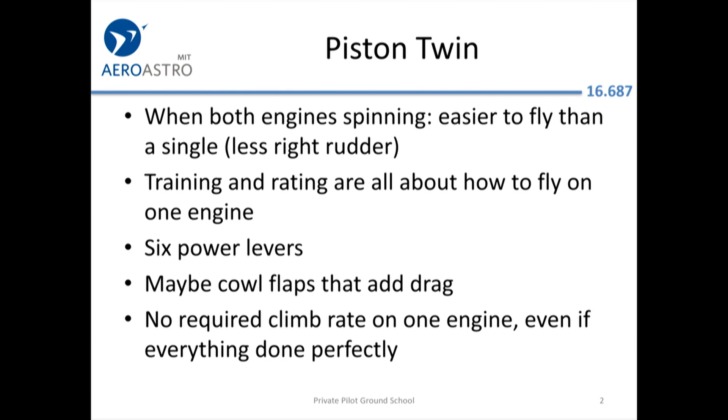There is, by FAA certification requirements, as I think I mentioned earlier, no required climb rate. It may be a truly crummy airplane on one engine. So that's why people say that second engine either takes you to the scene of the accident.

One engine expert, Mike Busch, said he came to appreciate the Cirrus parachute. It's not like having that extra engine out there on the wing trying to kill you all the time - it just waits there quietly until you need it.

Piston twins have an illustrious history. Here's an Aero Commander piston-driven twin that was actually Eisenhower's Air Force One. This also tells you something about the growth of government - when Eisenhower was president and wanted to go to a smaller airport, this is how he would go, in an airplane designed for about 6 people.

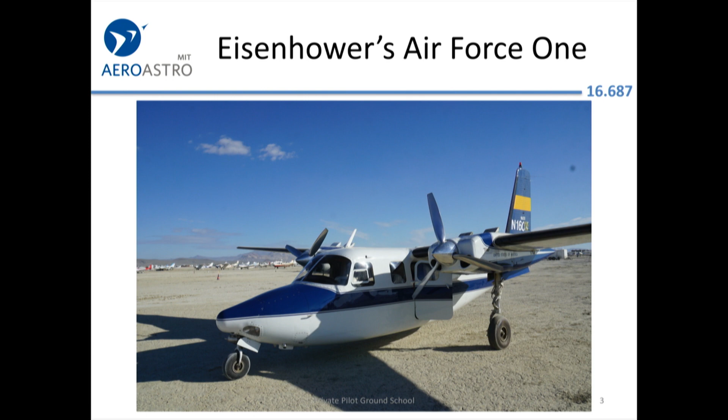Okay, this is probably what you'll be flying, which is the Piper Seminole. It is unusual in that the props counter-rotate, and that has some advantages that are beyond the scope of this talk. It's a design from the 70s, based on designs from the 50s.

Where the problems happen - so have a look here. Can anybody immediately see what one problem might be? Let's say the left engine quits and you have to manipulate these. What happens?

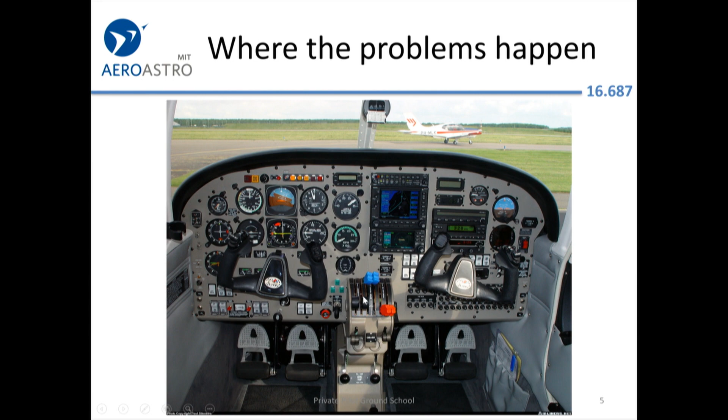You're manipulating the controls for the good engine instead of for the failed engine, inadvertently. So it's just an interface that's overly complex given human frailties.

So what do you have to do if an engine quits? You don't want the drag of that propeller out there that's not being driven by the engine. So you push all the levers forward to try to get maximum power out of your good engine. You'll have to put in some rudder to correct the yaw, because the airplane's going to be pulled to one side or the other, depending on which engine is still running.

And then there's the old adage: dead foot, dead engine. So if your left foot is flat on the floor and it's your right rudder that's in, then you know that it's the left engine that has failed.

Then you try to verify the dead engine by pulling back that throttle. So you'll say, okay, I think the left engine's failed, I'm going to try monkeying with the left throttle. And if that has no effect on the flight characteristics, you verify that it's the left engine.

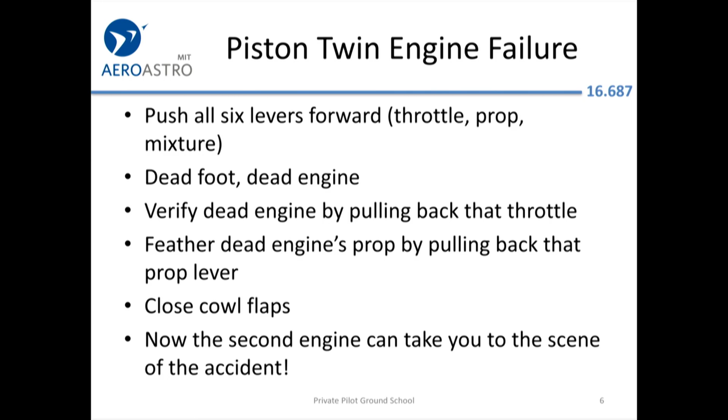Then you feather the dead engine by pulling the prop control all the way back. If you're in a 2-pilot crew, you'll get your co-pilot to verify: I have my hand on the left prop control. You pull that back, close the cowl flaps, and only now do you have any chance of getting an actual climb.

So imagine if this engine fails shortly after takeoff - it's a lot of stuff to do very quickly, and you have to do it all right. If you miss even one of these things, you may not be able to clear obstacles at the end of the runway.

Now, of course, your typical piston twin takeoff is a stressful time for an engine, 100% power, but there's definitely more engine failures that occur en route. So the generally negative impression of piston twins might have to be revised if your primary mission is flying around the Caribbean islands - you might actually say you'd rather have that second engine.

Is this within human capability, that sequence that you just saw? Yes. In World War II, when engines weren't being made with as much precision as they are now, it would be ordinary to have 1 out of 4 engines or 1 out of 2 engines fail on any given mission.

But they also got it wrong. There's one very famous guy, Louis Zamperini - some of you may have seen a movie about him. He floated in a raft for 47 days, which I think was a record at the time for survival at sea. He was on a 4-engined aircraft, and one engine quit.

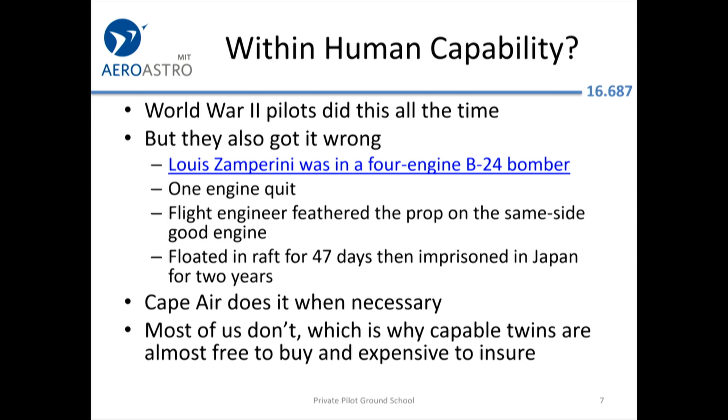There were about 4 pilots in the cockpit. Remember, a flight engineer is also an airman, so if we count the flight engineer as a pilot, there were at least 3 or 4 experts up front. And as a team, they feathered the wrong engine, killing a second engine that was actually good. Now they had 2 engines working on only one side of the airplane, and it was uncontrollable. So they went in the water through human error.

Cape Air has a great track record. They've had a handful of engine failures over the years. They fly piston twins all day, every day in the Caribbean and around New England. When they have a problem, usually it's not a complete failure, but maybe there's an ugly indication on one engine, so they'll shut it down. But they do a lot of recurrent training, since that's what they fly all day, every day.

The typical family airplane doesn't get flown as often, and the pilot isn't as proficient. So the capable twins are very inexpensive now, except for the Beechcraft Baron, which is kind of the most sought after. They're a little more expensive to insure than the comparable single.

Just the other day, I got a quote from a local insurance agency called Plane Insurance. We found out that if you look at a $200,000 aircraft being flown by a pilot with 250 hours of experience in type in that exact aircraft, and with $1 million of smooth liability, meaning no sublimits, that means if there's just one passenger, they would pay out all $1 million for injuries to that one passenger. Some policies have like a $100,000 per person sublimit.

Anyway, it was about 50% more for the Baron, $3,700 a year versus $2,500. So there you have it. Again, it's not insanely risky. You can quantify the risk the insurance company has, but it is riskier.

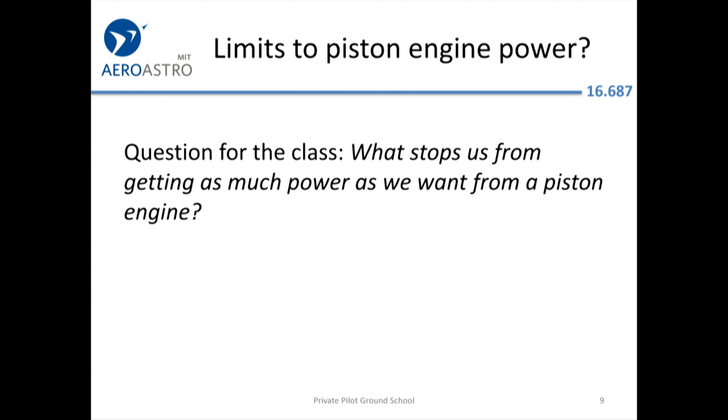So what's the limit to a piston engine's power? Why is it that we can't get 6,000 horsepower out of our piston engine? What do you guys think? Cooling is one, sure. What else? What's fundamentally limiting our ability to produce power? Remember, all the power that we produce is by burning fuel and oxygen.

Aziz? Size - yeah, I think that's a good insight. It's the size of the cylinder. You only have so much fuel and air that you can combust. And once you've blown all that up, what do you got?

Nothing. So if you want to know why you should never be like the Silicon Valley heroes and never hire anybody over the age of 30, the inventor of the modern jet engine was only 23 years old, I believe, at the time the patent was filed over in England. He was a cadet when he conceived of the idea at the Royal Air Force College.

He said, well, look, these pistons, no matter how high up you go, no matter what you do, all you can ever do is burn the volume of air and fuel that's inside the cylinder. So what if we just adapt this gas turbine, which has already been invented? It was kind of invented in 1791, but not really practical to fabricate at the time. But look, we're just sucking in all this air. We can probably get 20 times as much air in if we just vacuum it in and suck it into a turbine and then light it on fire. So that was the fundamental insight for why a gas turbine is going to be a better machine for propelling aircraft.

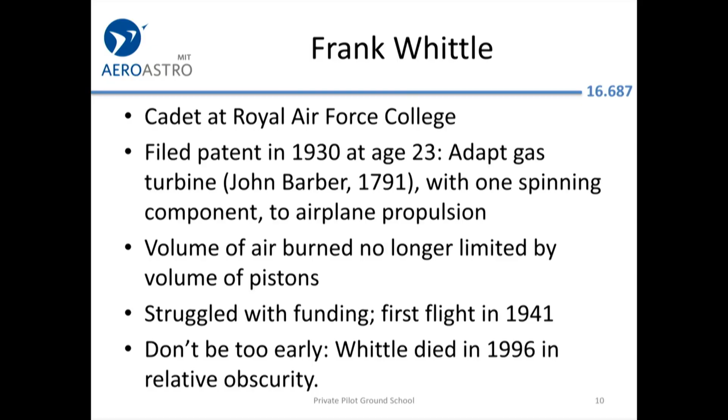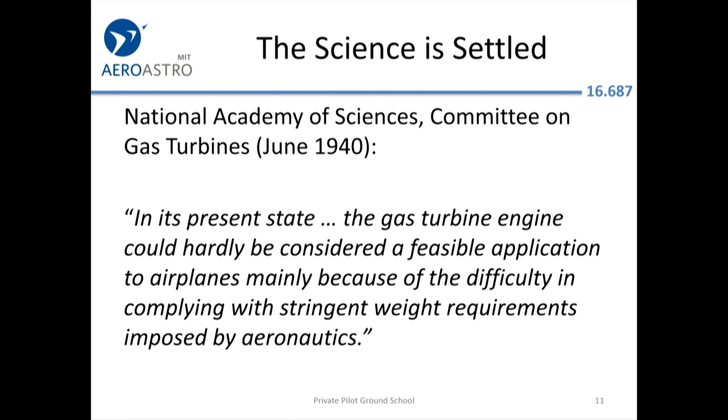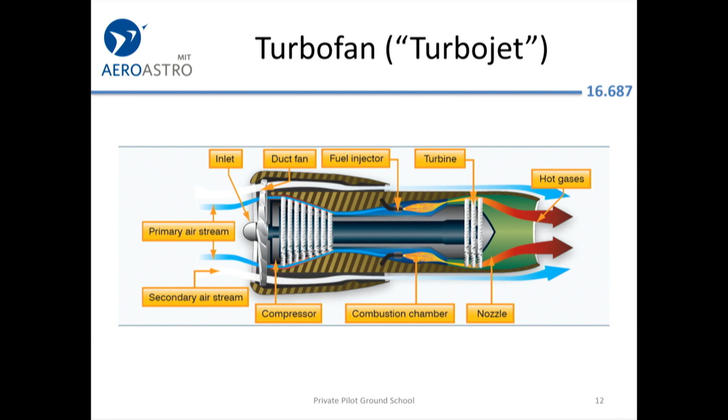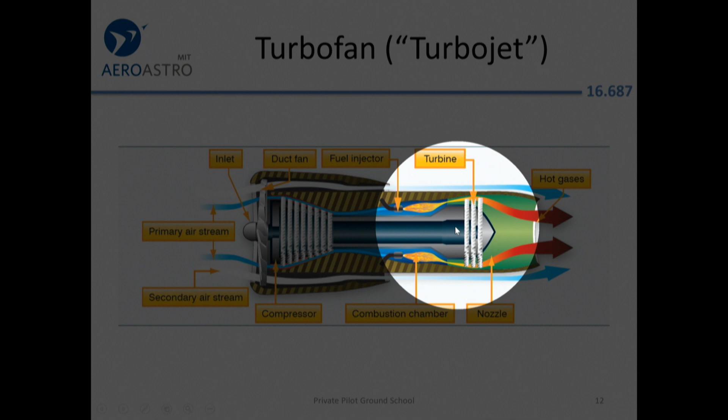So just to remind you, you have the compressor section where air is being squeezed. Now you introduce some fuel. It catches on fire from the extreme heat, or the igniters if you're just starting up. That drives these power turbines, and some of the spinning from the power turbines goes back to spin the compressor wheels as well as the fan in front, which is kind of like the propeller.

All right, what about having two turbojet engines? A lot of people like to see two engines on their aircraft, especially airline passengers. If you have an engine failure, what do you do? The answer is pretty much nothing. Maybe if it hasn't been done automatically for you already, you can advance the thrust levers. If the airplane is yawing, that's sometimes automatically corrected for you to a substantial extent by the yaw damper. You will step on a rudder to do the natural thing and bring the nose back pointed to where you want it pointed, and it'll keep climbing nicely.

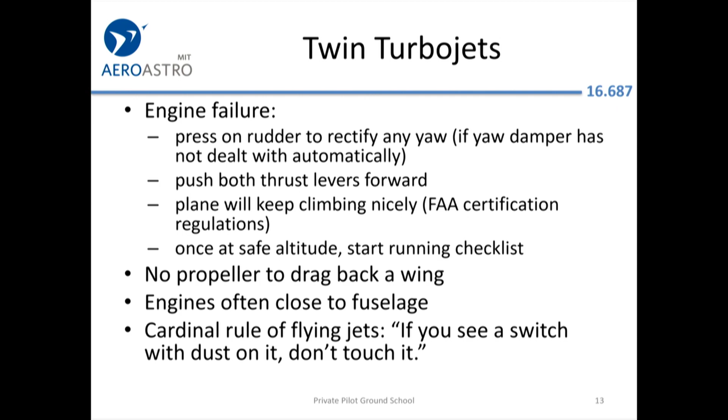You've arranged everything, both in terms of the design of the aircraft and the weight at which you took off, so that no matter the environmental conditions, you will be able to climb and clear the obstacles. This can be a challenge if you're taking off out of a mountainous, high-altitude, hot airport. You're not going to have a full load of fuel and a full load of people and bags, but by regulation, you're going to be able to clear the terrain safely, even on one engine.

Why is it so much easier? You don't have a propeller that'll drag back a wing, and therefore there's no urgency about feathering. You also have a little bit less of the crazy yaw because the engines are, in some aircraft, pretty close to the fuselage. So basically, you can still apply that cardinal rule of flying jets: if the switch has dust on it, don't touch it. So you don't have to take immediate action.

All right, if it's turbojet powered, though, you do need specific training, and you have to pass a check ride specific to that aircraft.

So most of you guys, except for Francis, believe that Captain Sully was all by himself in the A320, but actually anything that's more than about a 10-seater almost always requires two pilots, and according to the type certificate, it's not even legal to operate even the larger business jets with one pilot.

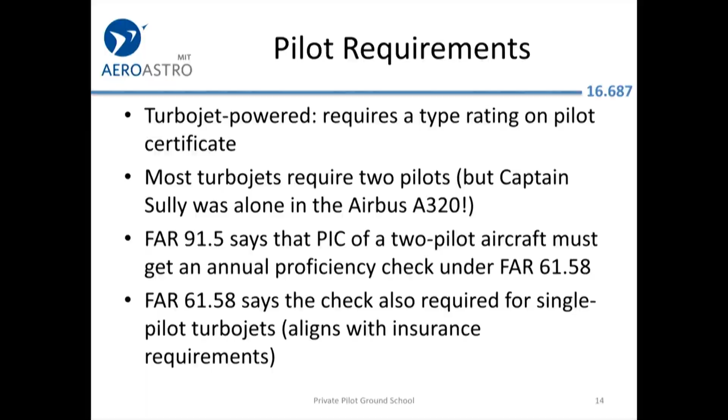There is an old FAR 91.5, I believe, that says there has to be a proficiency check annually for the pilot in command of a two-pilot aircraft, and more recently, the regulations were updated for single-pilot turbojets so that a check ride has to be done annually, which is not really that different from the insurance requirements of annual training. They just made it a little more formalized with FAA bureaucracy.

All right, turbojets that you might own: the single-pilot business jet with kind of a straight wing. They said initially the Cessna Citation was so slow that birds were hitting it from behind. But sometimes safety and having it be easy to operate by people of ordinary skill, or even lower skill levels, is better than getting that last 50 knots of speed. And that's what Cessna figured out.

So they're still kind of a leader in this area. They produced the Cessna Mustang, which you see there at the right. Some of the Microsoft folks spun off a design called the Eclipse. It was supposed to have these new cruise missile-inspired engines from Williams. The engines didn't work, so the 1,500 nautical mile airplane became a 900 nautical mile airplane with a Pratt & Whitney, more conventional design engine that's used on some of these other designs. The Embraer Phenom 100 has essentially the same engines as the Mustang, same family. HondaJet has an innovative engine designed by GE and Honda. These have all pretty much been business failures.

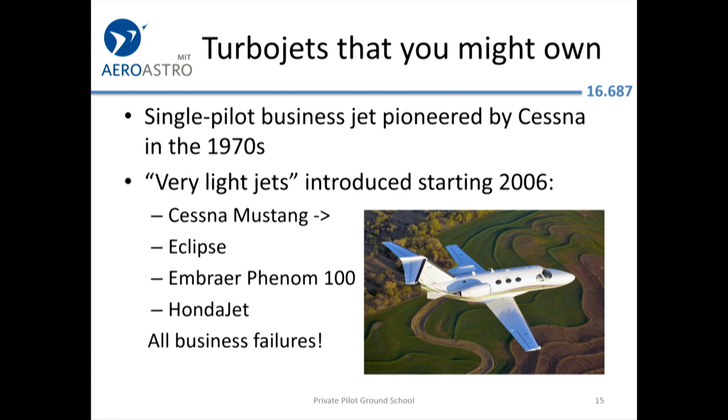And the answer to that is the fixed costs of jet ownership are so high. You can't just get a T-hangar for $800 a month. You may have to pay at one of the busier airports $40,000 a year to have an FBO hangar it for you. The insurance company will require simulator training annually, and you'll probably have to have 2 pilots as a practical matter go through training. Insurance will be expensive because the hull value is high. If you wreck a $5 million airplane or a $10 million airplane, that's a bad day for the insurance company.

You get charged a lot more for landing fees and parking at airports. When you're in a little Cessna, they kind of give you a break because they don't want you saying anything bad about them on airnav.com. But if you show up in a Gulfstream, they figure you probably have a credit card somewhere.

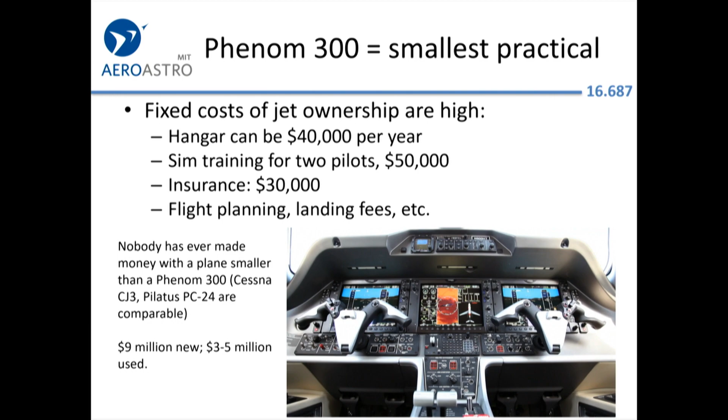The Mustang, they actually stopped production of that plane. The Phenom 100 is still going from Embraer. The Phenom 300 holds about 9 or 10 people, and I think it weighs somewhere in the 15,000 to 20,000 pound range. Those are the airplanes that seem to be popular at gross weight. Phenom 300 is about $9 million new, and 3 to 5 million used, and that applies to things like the Cessna CJ3. A $3 million plane could be a CJ3.

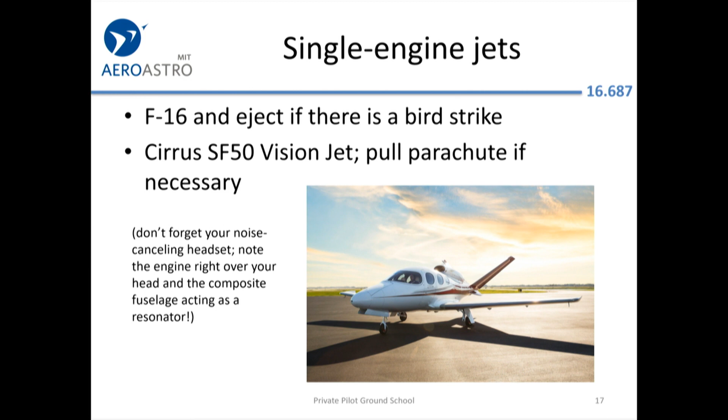What about single engine jets? The problem is they're more vulnerable to engine failure. Jet engines are a little bit more vulnerable to failure from, say, a bird strike than a piston engine, so you need some way of dealing with the consequences of an engine failure. The Cirrus jet is pretty slow, so it could actually be landed off the airport, perhaps without too much damage, but it has a parachute in case. F-16s and other single engine fighter jets obviously have ejection seats.

Twin turboprops, let's talk about those. If you want to land on a short runway - we talked about turboprop engines on day one - they can produce a tremendous amount of power, so you can have a much bigger, heavier airplane. But because they're driving a propeller, you get to take off and land short. They develop thrust very effectively at low speeds, and the prop is a huge drag, so when you land it slows down and stops almost immediately.

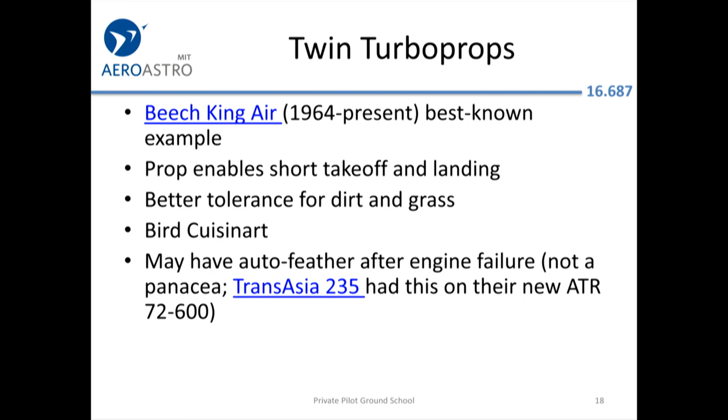The King Air from 1964 to the present, with these Pratt & Whitney PT6 engines that were developed at the very end of the 50s, has been hugely popular. When you hit a bird, it's a problem for the bird, but not usually for the propeller.

The King Airs and this ATR have an auto-feather system. If one engine loses power, the propeller will automatically go to this knife edge configuration. I should explain what feathering is - you twist the propeller blades so that they're edge to the wind instead of flat to the wind, which dramatically reduces the drag of the propeller. So that airplane actually kind of took care of itself, or should have taken care of itself pretty well.

You can read about that crash, I think it was in Taiwan. But the pilots decided to take heroic immediate action - or at least one of the pilots did - and shut down the good engine instead of just leaving well enough alone.

Okay, single engine turboprops. As these engines got more refined and more reliable - if you look at the PT6 design, it has all kinds of tubes and hoses and vacuum going from one place to another and bleed air - you'd be surprised that it's as reliable as it is. But they supposedly don't really have to be shut down for a problem or fail more than about once every 300,000 to 500,000 hours. So after that insight, people said let's just put one of them in, we don't need that second engine. It'll save a ton of money.

So the Cessna Caravan is a great example of that - that sort of boxy cargo plane that you saw on floats in the other video. For personal airplanes that are pressurized and more comfortable, there's the Piper Meridian, which is down here.

This is my friend Arnold, who's at Hanscom. He says he funded his airplanes because he was practicing during the golden age of gynecology, and that's what enabled him to afford his fancy pressurized Pipers.

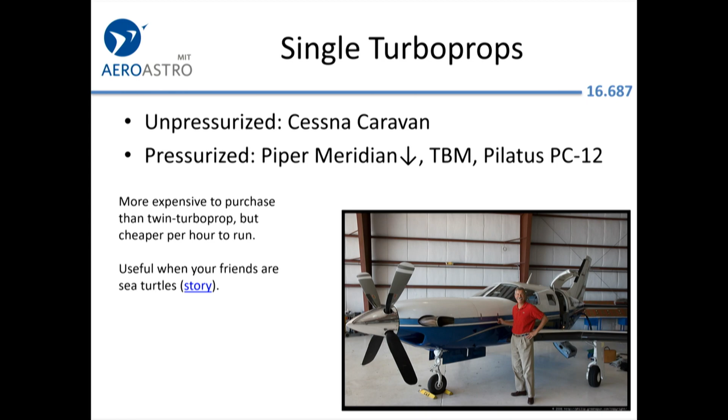The TBM is a French design that's considerably preferred to the Piper, but it's a lot more expensive. And then the Swiss Pilatus PC-12 is kind of a good airplane for a mixture of family use and charter use. The Piper and the TBM are kind of too small to justify all the machinery around charter.

Actually, old King Airs are cheaper than these single engine airplanes, but they cost a little more to run. When you're maintaining a jet - I think I mentioned this earlier - the manufacturer's guidance will supersede those catch-all rules of a 100-hour inspection for an airplane operated commercially, or the annual inspection for an airplane operated privately. It can get expensive on one of those Cessna Citation jets that I mentioned - coming out with a $100,000 bill from the annual would not be unexpected.

You usually have a time limit on the whole airframe, because if it's pressurized, it's getting expanded and contracted, with a little bit of metal fatigue on every flight. So you may have a limit on the number of cycles, the number of times that's happened, and also on the number of hours. A 12,000 hour or 20,000 hour airframe life limit might be common. For the Pilatuses, it's 20,000 hours, and then they have life extension programs where they tear the whole thing apart and replace some structures, or at least look at every structure. People have extended them out to about 32,000 hours, I think, now.

Cycle limits also apply to the jet engines. The turbine blades and discs - every time they're started and shut down, there's a huge amount of thermal cycling.

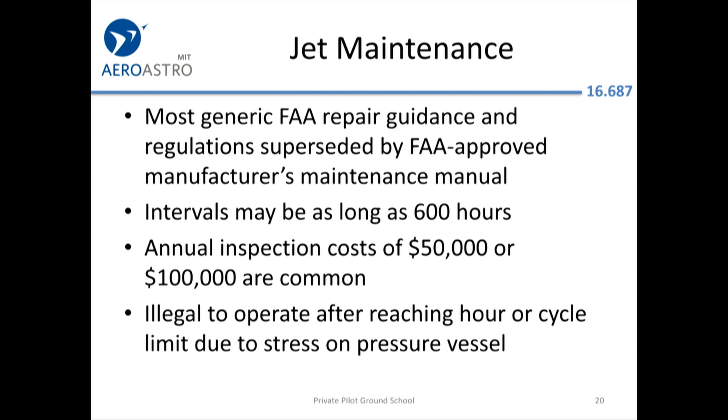So they say, look, after you've done that 15,000 times, you've got to throw that wheel out. And that wheel inside the turboprop could be $100,000.

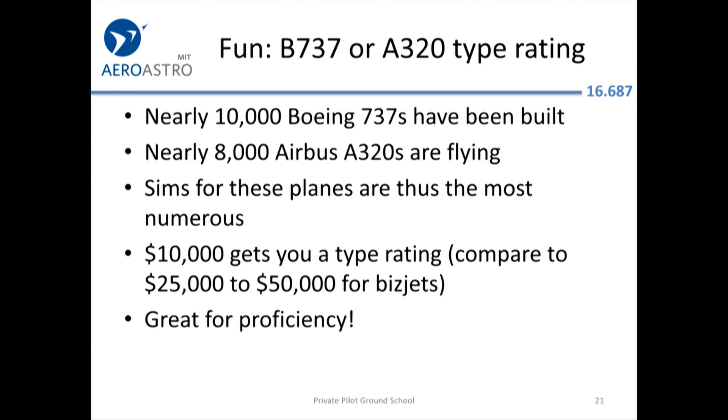It may seem hard to believe now that MIT has stripped you of all your savings, but if you do have a little money at some future date and want to get a type rating for an airplane, by far the cheapest type rating to get will be for a big airplane. A Gulfstream rating or a Cessna Mustang rating from FlightSafety is pretty expensive because they're relatively rare. But Boeing 737s and Airbus A320s, so many were made that there's a wide variety of simulators all over the world, and for about $10,000 you can jump in and get your instrument proficiency back up to snuff, as well as have a lot of fun.

As a summary, it's a good challenge to get that multi-engine rating. I wouldn't recommend practicing it unless you have an unusual application, like you live in the Caribbean and want to get from island to island. If you're nervous and somebody says they don't feel comfortable depending on a 5-year-old, 1,000-hour piston engine in front of them, the answer these days, I think, is it's better to get an airplane with a ballistic parachute as your backup than to have a second engine as backup.

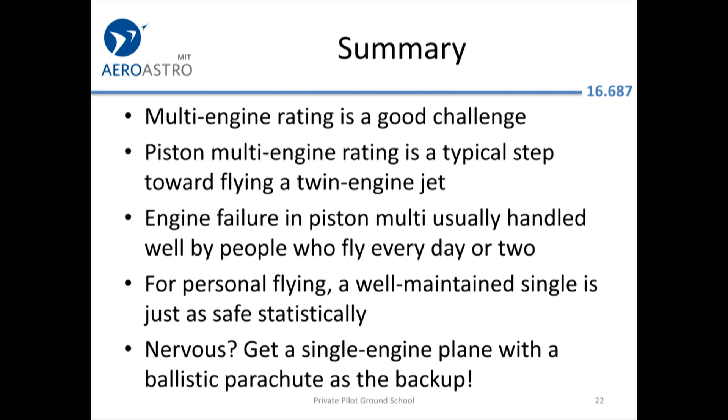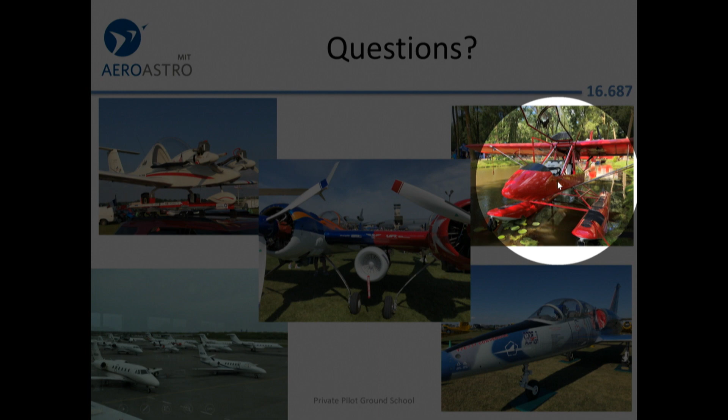Here is an Air Cam. That's an open cockpit, although this one has a canopy. That's from the Oshkosh Seaplane Base — a great airplane for flying low and slow over remote, somewhat wet locations.

Here's an L-39, a Czech military trainer. There's a company called Code One Aviation — they had one at Oshkosh where they took a regular American business jet engine out of a Hawker and stuffed it into the L-39, because it's cheaper to operate and maintain and has a lower fuel burn than the military engine. So you end up getting a lot longer range out of your L-39 if you want.

Those L-39s are only a couple hundred thousand dollars for a nice one. So you can actually own a fully aerobatic jet that looks like people will think it's an F-16, for less money than buying a Cirrus.

On the left is the ramp at Teterboro, that's what I was talking about. If you're working for Bernie Sanders and want to start a revolution in the US, I'd recommend starting right at Teterboro airport and just filming people getting in and out of their Gulfstreams. This is Meridian, the lowest cost FBO at Teterboro, and that's what the ramp looks like.

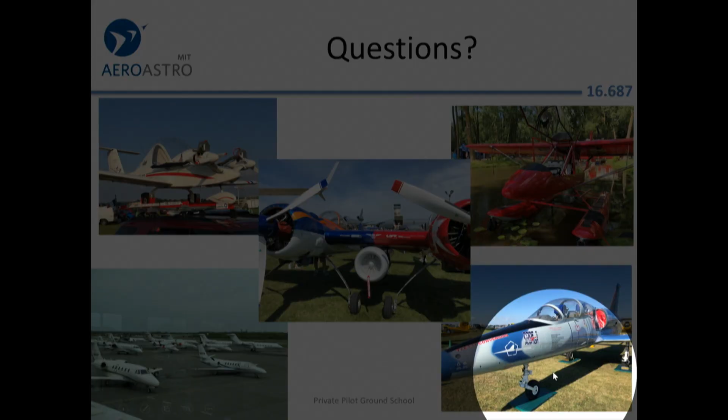If you want to combine 2 piston engines in a jet — I believe each of these is a Yak 55, and some airshow performer at Oshkosh glued them together and put a jet engine in the middle, calling it a Yak 110. So there you have it — that combines everything from this talk.

Any questions, or should we jump right into night? Who wants to fly a jet? Excellent.

So you said Cessna Caravans are single engine. I know they fly those commercially in Hawaii from island to island. How do you think they justify that?

Does anybody remember who was killed in that crash and what was special about that person? Not a flight attendant — it was a woman who was a State of Hawaii employee. What was special about her? She was the person who certified Barack Obama's birth certificate as genuine.